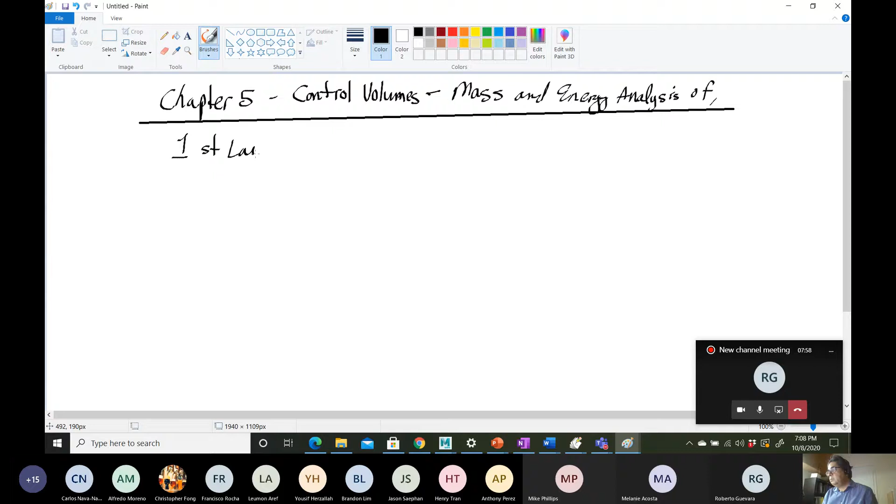So this will be the last chapter where we're dealing with the first law of thermodynamics. Starting chapter 6, we will be transitioning to the second law of thermodynamics. So things get a little interesting. Mathematically, I think chapter 5 is more intuitive, but once we get into chapter 6 stuff, it gets a little bit weird. It's almost like there's a little bit of a philosophical part of chapter 6 looking at the second law. So to summarize this chapter here, it's the first law for control volumes.

All right, so if you don't remember the first law, you might want to go to our chapter 2 lecture notes to kind of familiarize yourself with it. But we'll explain a little bit right now. So I'm going to go ahead and draw. We have a tank.

All right, so one thing I did tell the other class is that this lecture that I'm giving right now, I gave part of it about 3 years ago to a bunch of professors at Cal Poly in San Luis Obispo, as I was applying for a permanent tenure track teaching position there. So I might as well share.

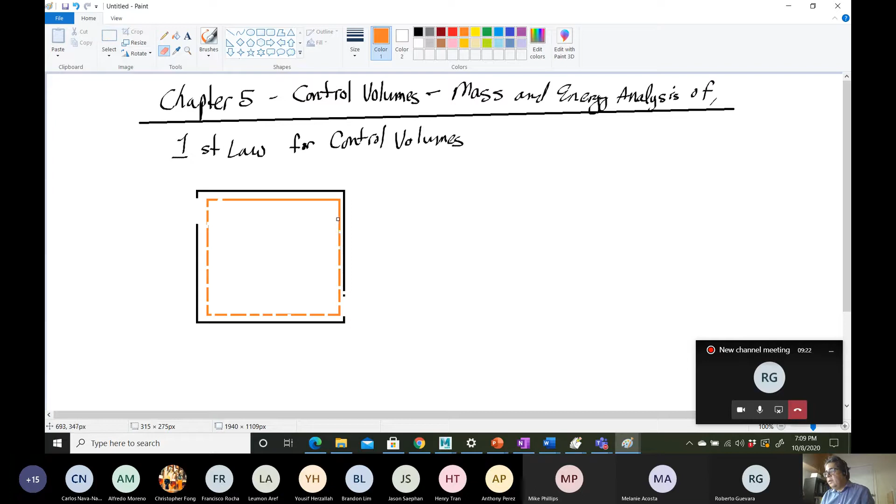The funny thing is that I work in a really good area right now, and I get to design spacecraft that go into outer space. And not only that, I work on cool projects. For JPL, for the 13 years I was there, I worked on Mars projects. I worked on the Dawn project. We sent the satellite to a dwarf planet called Ceres, and I operated the satellite. So I was there in the operation crew. So I got to do a lot of cool stuff throughout my career, and I really enjoy the work that I do. But I always had this itch to teach full time.

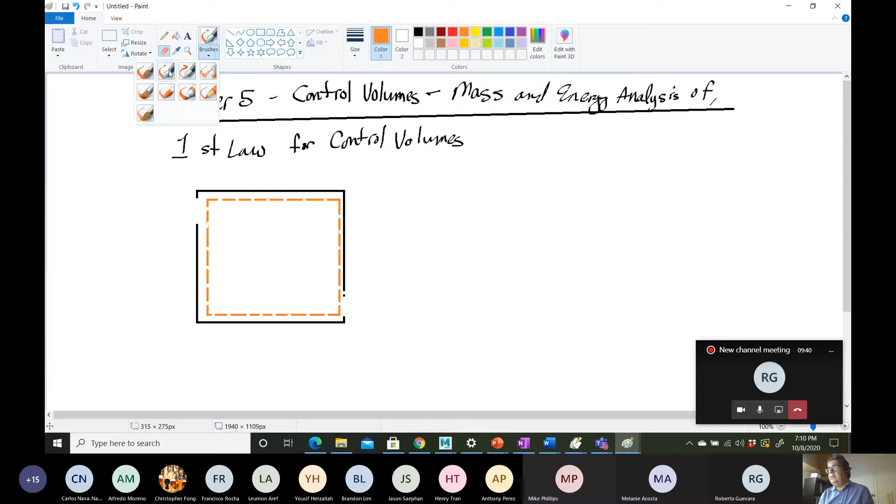I like teaching, right? I feel that for me to do a really good, thorough job of it, I would love to teach full time, because my day job is to do that. I know it sounds weird because some people are probably thinking, yeah, but I work in industry, so bringing industry to the classroom is a good thing. It is. However, helping students is more of a full time thing. Long story short, I didn't get the teaching job. This is 3 years ago, and there's a story behind this lecture, because I had to prepare a lecture and do a mock lecture for students, but there were professors there, and they got to see how I gave a lecture.

They tend to do that with faculty that are hiring or looking to join them. And I thought the presentation went well, except there were a lot of problems with it. So for one, they told me, okay, prepare a lecture, and I said, okay, I'm going to do it on control volumes, chapter 5. Well, they use a different book, but the guy I was talking to was a thermodynamics professor. He said, control volumes, are you sure? Are you sure you want to touch that subject? Very mathematically intense, he said. You may set yourself up for getting a hard time, some of the professors may push you on certain things. And I said, that's fine. I don't care. This is a subject that I like and I feel comfortable teaching.

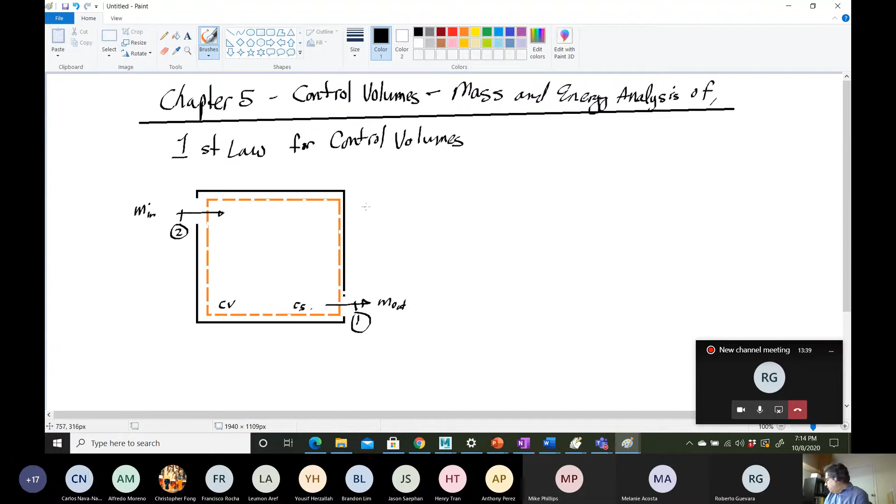All right, so this is the first law of control volumes. Up until this point we had a box and a control surface, CS, which encompasses a volume, the control volume. But this is the first time we're introducing mass coming in, a flow. So there's energy associated with flow. There's energy associated with the fact that there's mass coming in. If it's at high velocity, there's going to be energy associated with that. There are also pressures associated with it. It could be kinetic and potential energies. So we're introducing a new area of energy. Let's talk about conservation of mass.

The conservation of mass is a little bit like the first law. The first law is conservation of energy, so don't get that confused. Conservation of mass is very similar. The mass that comes in minus the mass that leaves a control volume, or crosses through a control surface, is equal to the change of mass of the control volume, which is M2 minus M1. And the units here are in kilograms.

Okay, I've got to draw a box on this. This is the conservation of mass. It's a lot like the conservation of energy, but now it's mass that we're looking at. It follows the same law. I'm just going to write it here because I'm going to write it again in rate form. So I messed up here. I don't know why I put a 2 there. This is 1.

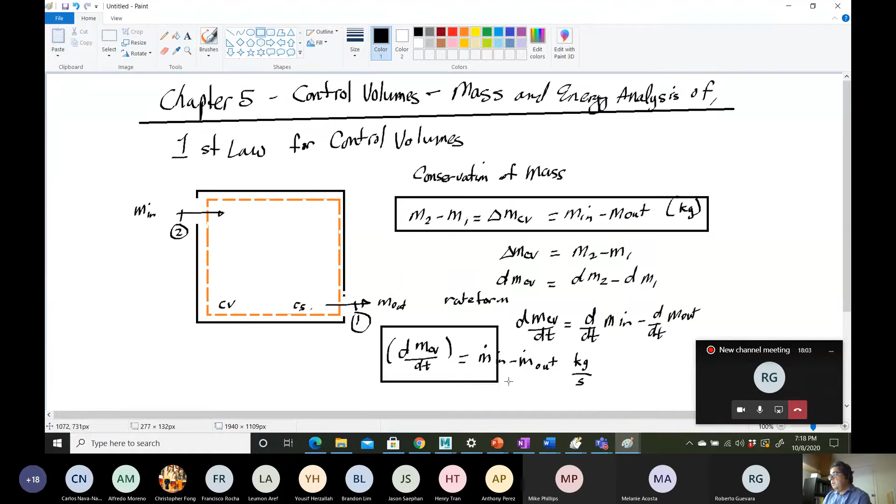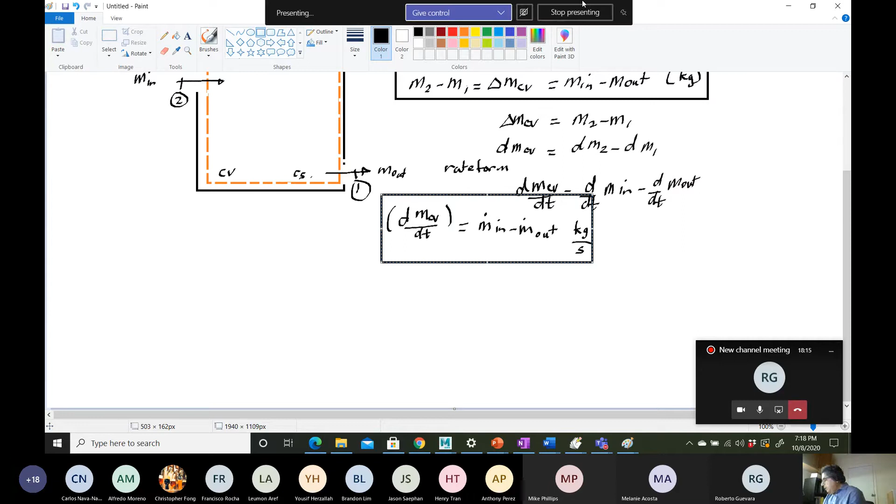The units here are kilograms per second. Go ahead and draw a box around there. Sorry that I'm encroaching on the other problem. So that's conservation of mass in rate form. Now I'm going to draw a new page so I have plenty of room, because this next bit is a little large. I'm going to draw a box and look at it a little differently. I'll draw a nice big box, and I have an entrance, just like the previous one, and an exit. So I have an opening and an exit.

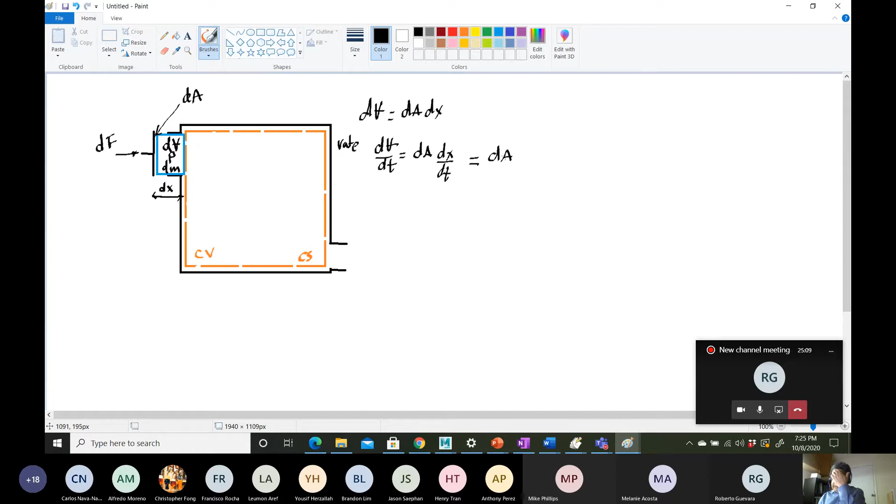So we know that the volume changes as a function of time. The area does not. The area is constant, but we know the distance changes as a function of time. And we know that dx/dt is a velocity, right? It's the rate of change of distance over time. So we call that v, and we'll put an arrow over it so that there's no confusion. That's the normal velocity through the control surface. So that's not volume, it's velocity. dx/dt is velocity. So let's keep that in mind. We're going to use this part later.

Now let's say this is the flow rate, or the change of volume as a function of time, is equal to the area dA times the velocity of the fluid. Okay, very good. Now let's go ahead and take the differential mass, and we want to give it a dot. So the flow rate is equal to the density times the volume, right? So density times volume will give us m dot. Or, I'm sorry, the volume flow rate.

So the volume flow rate is actually dV/dt. So that was the volumetric flow rate we just found up there. So density times volumetric flow rate. Instead of writing density, we're going to say 1 over the specific volume, times dV/dt. So the volumetric flow rate times 1 over the specific volume is equal to the differential of the mass flow rate.

Professor, could you say that one more time? I'm colorblind, so the different colors... Oh, yeah, sorry about that. Okay, so let me explain this.

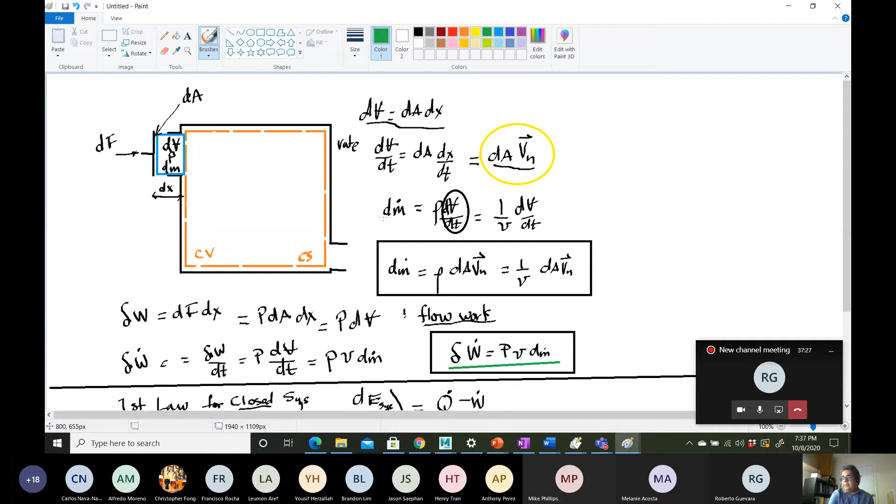With one hash, this is the part of the equation that has to do with the energy of the mass. Imagine the mass that comes into the control surface, that punches through. If I scroll up, that blue part there, that fluid that comes in, imagine that's like a bowling ball. It's the energy of that bowling ball going through the tank, crossing the control surface. That's what's in the single hash there.

And here with the double hash, I didn't mean to do that, it's this one here. This is the work, this is the flow work. So what we added to the chapter 4 closed system: now we're adding the energy of the mass flow rate, and then there's the energy of the flow work, which has to do more with pressure volume. Okay? All right, cool.

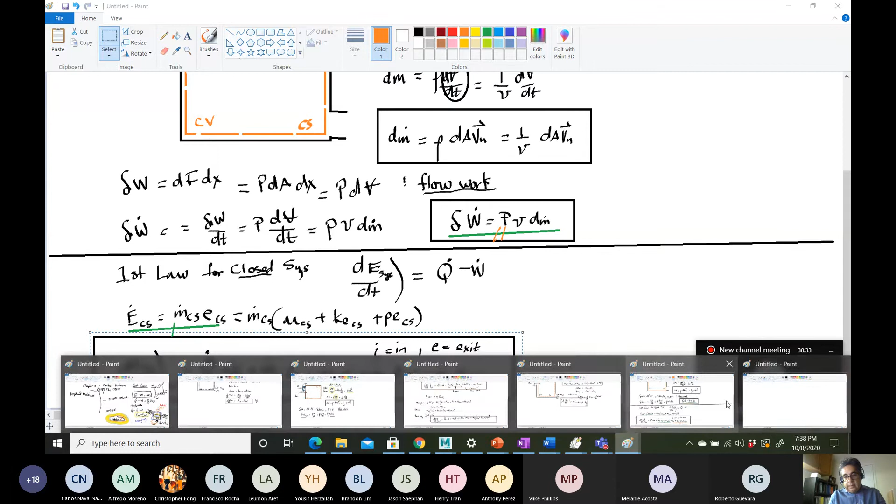So let me go back here and continue this discussion. It would have been nice to have that. Let me go to the previous page and copy that equation, because we're going to refer to it right now. Let me select that and paste it up there. Okay, so now let me go ahead and explain some more.

Okay, good. So the end goal is to give you an equation that's simplistic, because this is actually going to get worse before it gets better. And let me explain. Because we need to include enthalpy here. All right. Or else it's going to get out of hand. The enthalpy term is going to get rid of our PV and our U terms. You guys remember that from last time?

So the way we're going to do that is we're going to collect these terms here. So there's the mass that comes in. So we'll put that as m dot here. The flow rate that comes into the system, EI, plus mi dot pi vi. We're going to call this pi vi. We're gonna treat that a certain way. So let's go ahead and take the equation up at the top. We're gonna factor out m dot I. We're gonna say that is EI plus pi vi.

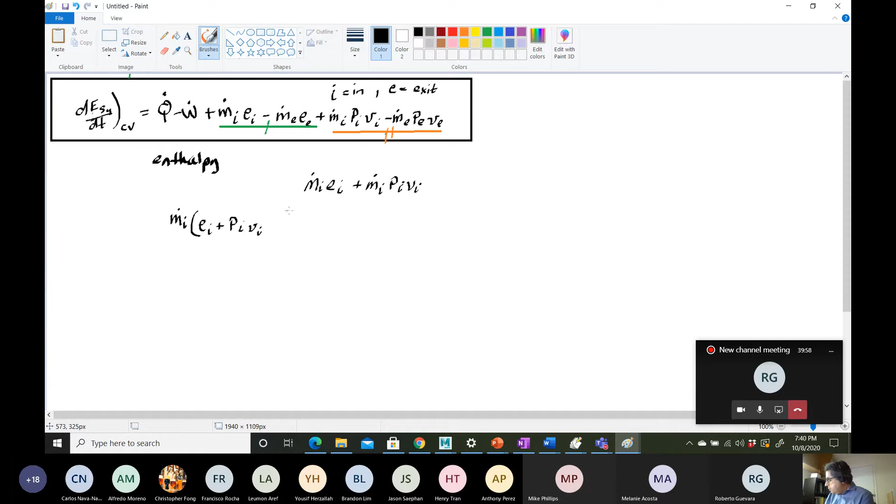And then, instead of using E, we have to associate the mechanical energy associated with the fluid. So we're going to say that is m dot I again. And now we have to start everything that's associated with the letter E. That's UI plus KEI plus potential energy EI. And then we're going to throw out here, just in case we didn't cover everything, there might be energy associated with something else, like electric work or something like that, that we didn't cover. Plus PI VI. So that's the complete E term here.

This is basically this guy here, right? That's what we went ahead and just converted into U's and KE's and PE's to give a complete picture. All right, so it got ugly, right? Just as we were thinking we were going to get the nice equation, it got a little ugly. But don't despair, because what we can do is we can collect terms. We know that enthalpy, that thing in the back of the book that you use to determine how much energy it takes to evaporate water and such, is equal to UI plus PI times little vi, right?

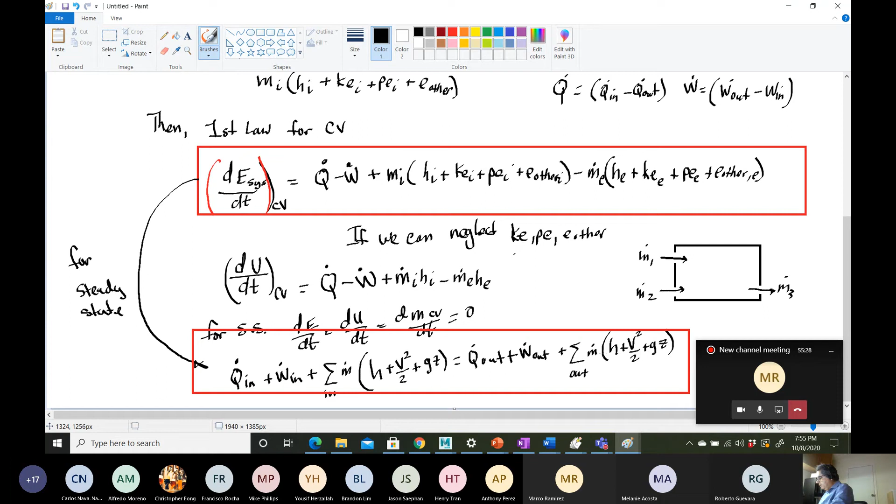We got 5 minutes, and I would love to set up a problem, but we wouldn't go anywhere with it, so maybe I shouldn't. But maybe we can talk a little bit about what this solves. We're going to use this to solve problems. It's energy analysis across problems that have flow rates. So what kind of components have flow rates in them?

So the problems that we'll solve are energy problems associated with the following components. So that would be nozzles, and diffusers. A diffuser is just a nozzle backwards.

There's also heat exchangers, because the heat exchanger has flow coming in, flow coming out, different areas where we might be exchanging from one fluid to another. Valves, control valves, flow valves, anything having to do with valves, pumps, turbines, mixers, like this is a mixer right here.

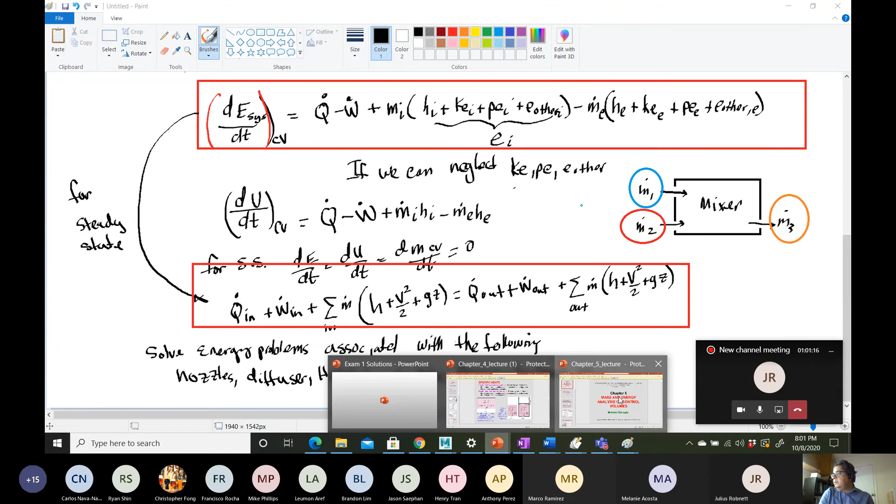So, okay, this is all nice, but I don't need to know all this stuff, right? I just need to get to the bottom line, and I got you to here. And in reality, it gets even easier than that. When we start solving problems, they actually boil down to something more like this. You might have seen this before, right? But it all comes from this.

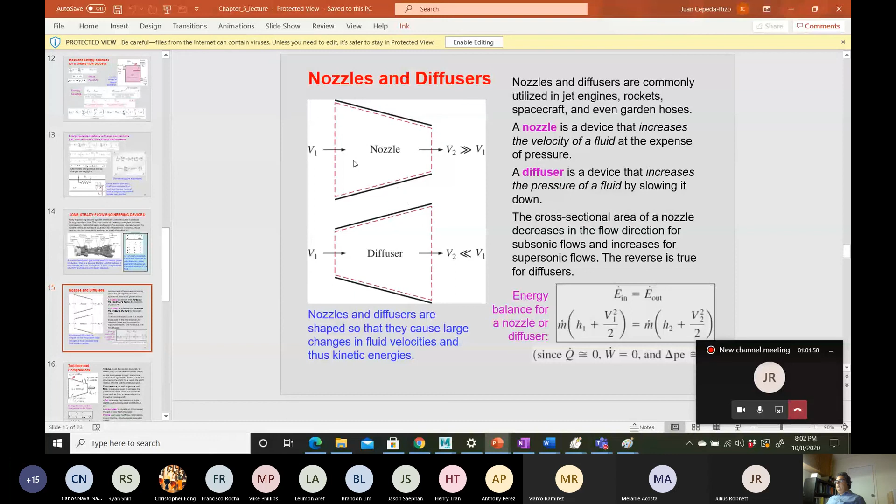It's not just one entrance coming in, one exit coming out, right? Sometimes there can be multiple taps, and that's why you have to put that summation to include all the multiple taps of water coming in. For a nozzle or a turbine, you got one mass coming in, one mass coming out. But then you may have a mixing chamber with 5 flows coming in and 2 flows coming out. So that's why you have to use that summation.

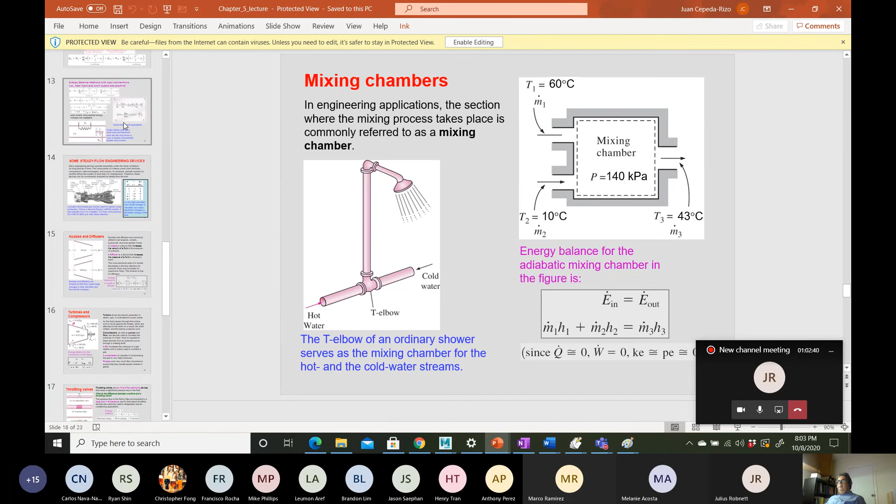And it really comes down to this: everything that's coming in is on the left hand of the equal sign, M1 and M2. Everything coming out is on the right hand. This was simple because this is a steady problem, so that dE/dt term falls out and it becomes a simple equation. So this big equation boils down to this for the mixing chamber, just this simple equation.

But that's why I had to give you that, because then you might have a 4. So for heat exchangers, we have a flow rate and we have 4 points, right? 2 points have flow coming in and 2 points have flow coming out. So everything that comes in, you put on the left hand of the equal sign.

Anyway, we'll do example problems, and I wouldn't call this the toughest chapter, but it's definitely the most computationally intensive one. This is one chapter that if you got into any kind of fluid, heat exchangers, any fluid systems, you're gonna come back to this.

I had a student at the last class saying his teacher told him that 20% of what you learn in school you'll apply in real life. Of this chapter, if you go into heat transfer and anything to do with flow rates, you'll use 80% of this.